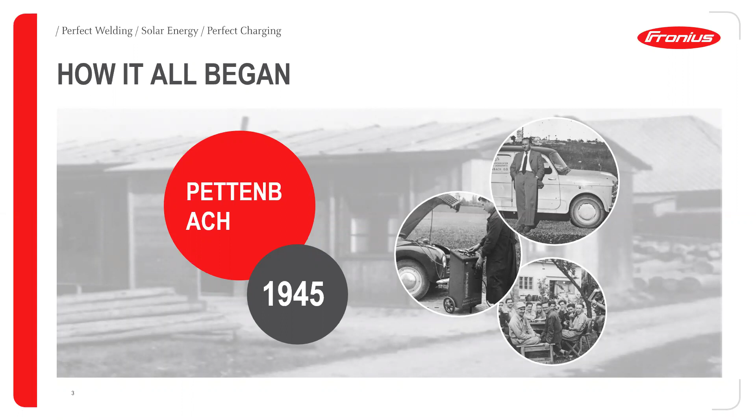To give a small introduction about Fronius - probably some of you might know, or some of you are new, as I mentioned. It all started by Mr. Gunther Fronius, on his name, in 1945, right after the Second World War, in Pettenbach, Austria. He started repairing car batteries, and found a charging technology to fix the car batteries and resell them.

Later, today we have 3 business units: Perfect Charging, Perfect Welding, and Fronius Solar. That's the latest, but still we have 27 years of experience in the Fronius Solar business. It started in 1992 with our first inverter.

And why Fronius? There are many PV inverters available in the market, probably for a little less price. Why Fronius? We have 27 years of experience, so you have to pay for that - no, sorry, it's not that. We have something different on board, like a better cooling concept, better operating things, and also a better algorithm for shadowing. There are a lot of technical aspects there.

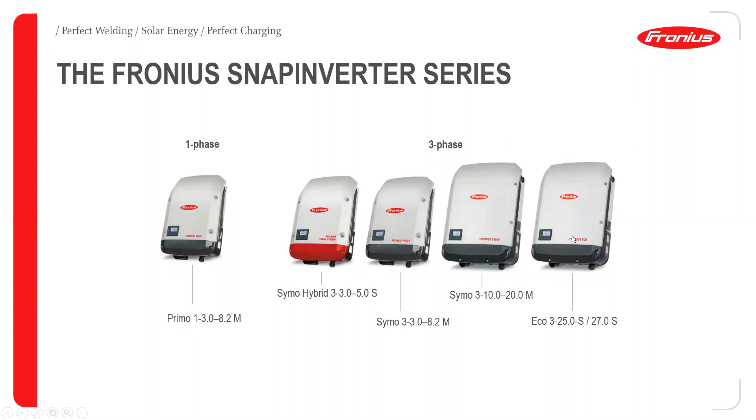Residential, we have two groups: residential market and commercial market. Commercial means in Sweden - I think there are some 20 megawatt parks going on. So we can't say Sweden is a small market, but it's a growing market for commercial.

But getting back to residential, Sweden is really, really interested in selling a lot of residential PV systems. It's growing, almost doubling every year. You all know about it, I'm sure.

So SYMO or Primo, these are the residential inverters from 3 kilowatt to 8.2 kilowatt. What does this 3 mean? That's 3-phase. And S or M - S means single MPP tracker, M means multiple MPP tracker. So next time you see SYMO 8.2-3-S, yes, that means it has only a single MPP tracker.

Many people buy the M version even though they don't have two different roofs or shading - they just buy M without seeing if it's necessary. Please use our tool, our solar configurator tool, which can tell you which inverter suits your needs better.

So you don't need an M version if you don't have shade and if you don't have two different tilt angles or two different roofs. You just buy the single MPP tracker version.

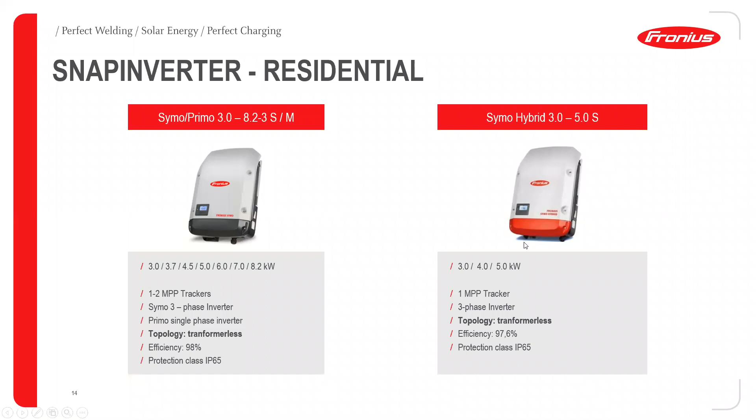Just a second. Hi, Tim. Are you there? Sorry, I thought I hadn't started the recording. No, I have started it. It's okay, it's still recording. Okay, thanks, sorry, I just have to remember whether the video is recording or not.

We actually had a question from the chat, so we can take it: what is the efficiency referring to, what load and which conditions?

That's basically a weighted average of different conditions - low load, mid load, and high load. Based on different loads, you can get this efficiency.

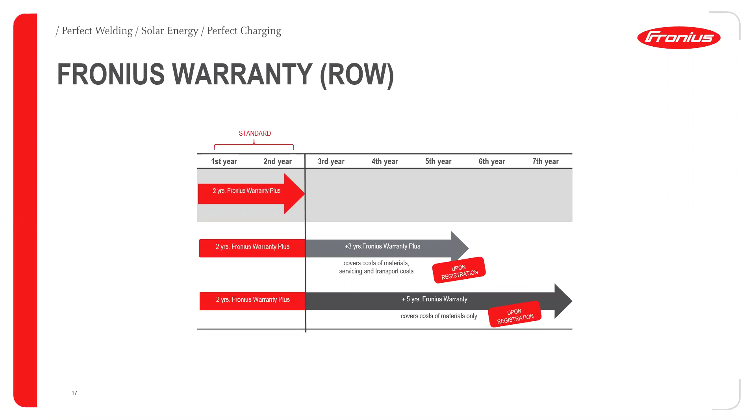Also, if the customer wishes to buy more than this, you can extend it on the website. Of course, there's a difference in price depending on whether the customer does it or you do it. That's a different topic.

Fronius storage solutions. As I mentioned, this red color is meant for battery-connected inverters. The red bottom cover is the only visual differentiation. Of course, there's a sticker mentioning Symo Hybrid, but instead of normal gray covers, we have this red cover only for the hybrid inverters where you can connect batteries.

They are 3, 4, and 5 kilowatt 3-phase inverters with a single MPP tracker, because the other MPP tracker is dedicated for the battery. There's also a backup power mode option, which means that when there's a grid failure, this inverter will start and run, and it can supply power if you have installed the emergency power switch. You can connect an LG Chem and BYD battery.

So far, probably many of you installed Fronius batteries, but we had to discontinue them last year, I think, because they were produced by Sony for Fronius, and Sony decided to stop that battery. So that's why you can't have this battery anymore. Sorry for that. But LG Chem and BYD are definitely going well, and I know many installations in Sweden have these LG Chem and BYD batteries.

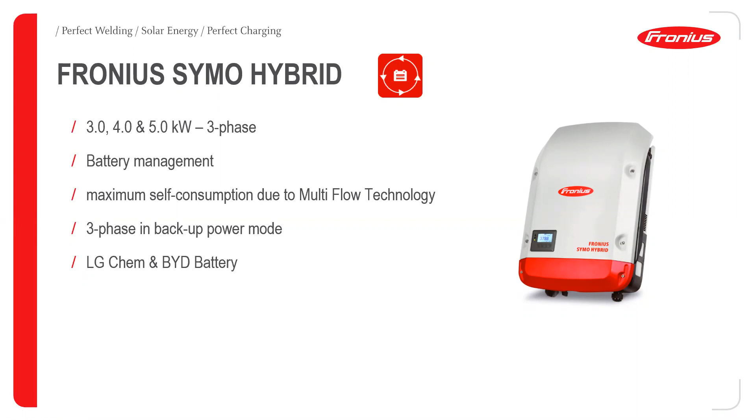Single line diagram of this. An important thing about Symo Hybrid is that with a normal inverter, it depends - you don't need a smart meter. But when you want a Symo Hybrid connected to a battery, you definitely need a smart meter, because this tells the system when to charge and discharge the batteries. So the important components for a hybrid inverter are the hybrid inverter itself, the Fronius smart meter, and then the battery.

For LG Chem, you need an additional component called the Fronius checkbox, because this checks the voltage coming from the inverter. Since LG Chem batteries cannot handle more than 500 volts, it checks the DC coming from the inverter. Of course, it's not going to send out 500 volts all the time, but in case it accidentally does, we don't want to damage the battery - that's why we have this checkbox. It will disconnect the battery if there's high voltage.

Apart from that, sometimes I see installers - some new installers - just connect the battery-to-inverter cabling but forget the Modbus cabling. Or sometimes they do the Modbus cabling and the power cabling, but forget to turn on the interface page. By default, the inverter will not know if you have a battery connected or not. So you have to access the interface page of the data manager and turn on the battery setting - that's when the inverter knows there's a battery. Otherwise, you can connect the battery, and even if the Modbus connection and cabling are correct, the battery will discharge but will never charge unless you tell the inverter there's a battery connected.

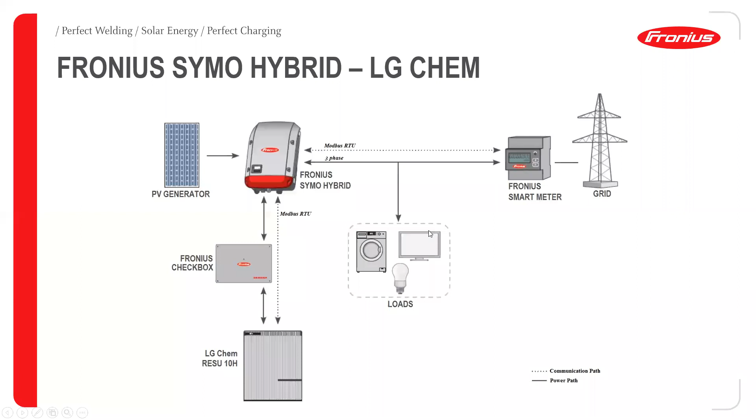Vinoth, we have a question in the chat: does the inverter of the battery provide 50 hertz, or how does that work?

You mean in the emergency power mode? Okay, to give you more detail, no, that's not 50 hertz, it's something around 52.5 or 53. When I say emergency power mode, remember I mentioned that when there is no grid, the inverter will restart in emergency mode - that's a secondary country setup. So in this emergency mode, the inverter will produce a different hertz. That's why you cannot have a secondary producer involved during emergency mode, because that inverter needs 50 hertz to start and run, but this inverter will produce 53.

If it is for countries like Sweden, the normal grid is 50 hertz, so this emergency mode for Sweden is like 53 hertz or something like that. But for countries with 60 hertz, the inverter will start up at 63 hertz in emergency mode. So it's not the same frequency as the normal grid.

That's basically to make the inverter able to listen to the grid and check - if something else is at 50 hertz during the emergency mode, then you know either you're connected to the grid or you have another inverter connected, which you're not allowed to have. So yes, it's basically a self-check achieved by changing the frequency.

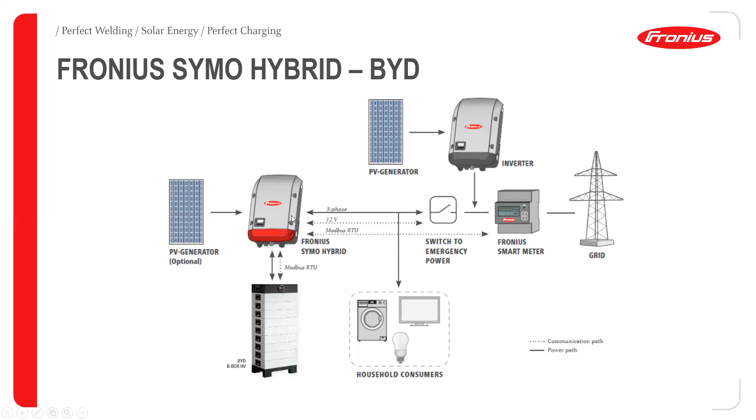As I mentioned, is there any battery option for Fronius Symo, Primo, Galvo, or Eco inverters? Yes, there is one option: Solar Watt batteries, MyReserve Matrix. There's a certificate available on our website showing what's possible with Solar Watt battery. There's also a webinar available for this and all the topics I'm discussing now - a detailed webinar on the Fronius Solar website. If you can't find a webinar on a topic, you can always contact Tim or me so we can arrange a new detailed webinar. Hopefully there are webinars for everything - Home Pilot, electric vehicle charging, batteries, Solar Watt batteries, BYD batteries, LG Chem batteries, everything.

Coming back to Solar Watt batteries - if you want to have a Solar Watt battery installed, to give you a brief overview, you need 4 components: mainly the inverter (Fronius Symo or Primo Galvo), the battery itself (Solar Watt battery), Fronius smart meter, and Fronius Solar Watt AC sensors.

This is very important if you are connecting a solarwatt battery, because here the solarwatt AC sensor communicates to the battery when it has to charge or discharge the DC power. These batteries are installed between the PV module and the Fronius inverter, so that it stores the excess DC when there is no need for PV to produce.

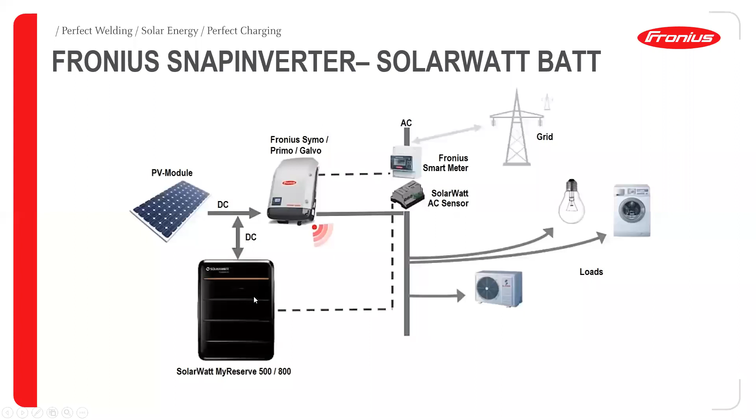Primo Gen24 is not our interest because that's a single phase inverter. Symo Gen24 Plus is the three phase inverter with power classes 6, 8, and 10 kilowatt.

So what are the advantages? What do we learn from the Symo hybrid, what improvements did we make? One, we learned that there is a need for bigger power class hybrid inverters. And next, we learned that we need 2 MPP trackers for the PV itself. So in this inverter, in total we have 3 MPP trackers: 1 for the battery and 2 for the PV.

So 2 MPP trackers dedicated for PV, so you can connect 2 different roofs, or connect different shading panels into a second MPP tracker, or whatever you think. And then there is no display.

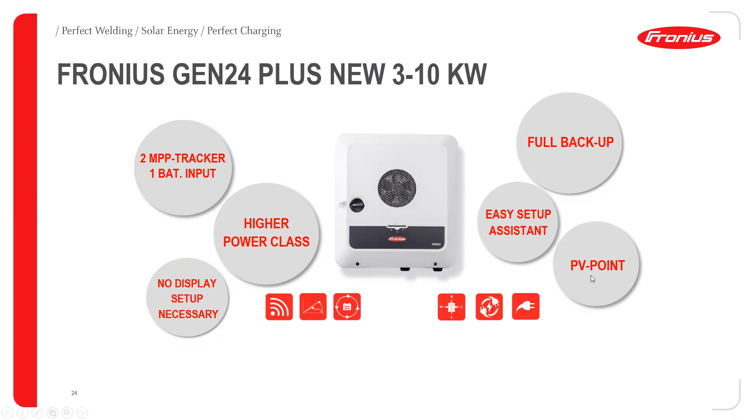Symo Gen24 Plus is a 6, 8, and 10 kilowatt unit with easy planning, installation, and commissioning. We have been testing this commissioning specially, mainly for easy setup, user-friendly operation. The commissioning procedure is step-by-step with the display: choosing language, choosing country, choosing if you want to keep the MPP Tracker 2 on or off.

It's the same thing, but without a display. As soon as you establish a connection between your smartphone or tablet to the inverter, you will choose everything in the phone or the tablet - just the same procedure, except there is no display in the inverter.

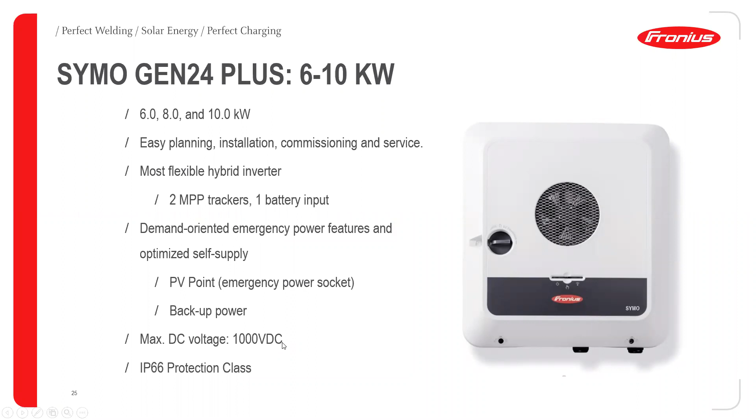As mentioned, it's a more flexible hybrid inverter because we have 2 MPP trackers for the PV itself. There are 2 different kinds of emergency power modes: one is called PV point, and the other is full backup power. We will see more detail about these in the next slides. The maximum DC voltage is, as usual, 1000 volt DC, and the IP protection class is IP66.

PV point - this is a basic backup power. It is possible to have a PV point in all the Symo Gen24 inverters. There is an option on the AC side, next to the AC connections, where you can take a single phase output. You can create a plug point anywhere in your house or garage, and this plug point will work when there is no grid. There are no additional switching components needed for this - it has its own terminal in the inverter.

This is functionable without a battery as well, and of course it will also work with the battery. But sometimes when it comes to hybrid inverters, people are preparing for the future - they just buy the hybrid inverter but don't have a battery for 2-3 years. Still, they can use this PV point function without a battery.

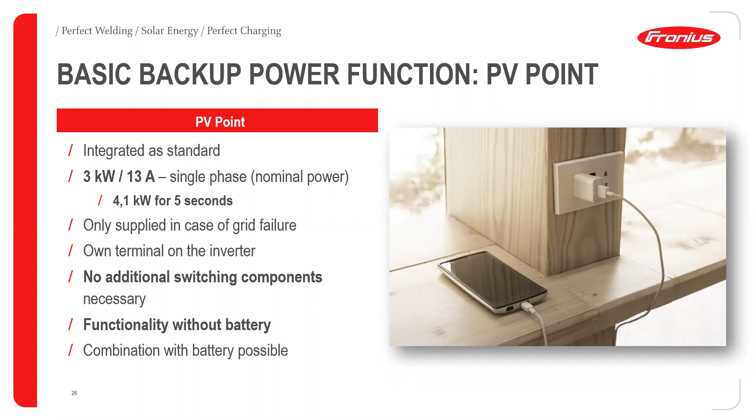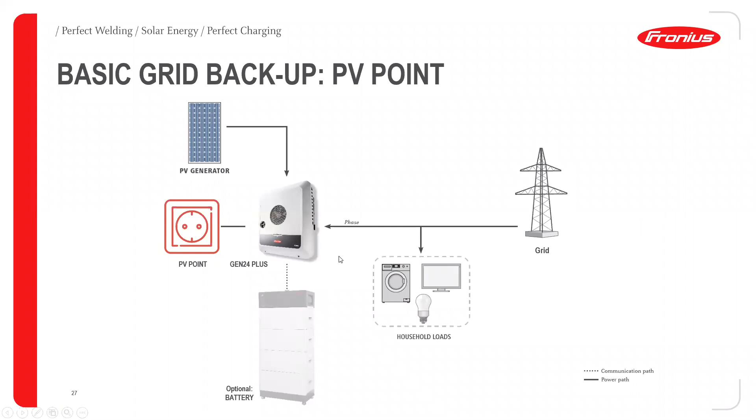Let's look at how it works using the single line diagram. So PV generator, like PV panels, Symo Gen24 Plus, and battery - that's optional. When there is no grid, this PV generator will still produce and supply only the PV point. Remember, not the normal output point, because without a grid, the normal output power will not work. So basically the inverter will produce and just supply one single phase point.

There is a limitation - you can't have like 10 kilowatt in this PV point, it's only possible 3 kilowatt. What happens if it exceeds that? Of course, it will turn off. If you try to connect a 5 kilowatt motor to this PV point, it will not start up. So it's 3 kilowatt single phase and maximum 13 amps. If you exceed that a little, it can withstand for a couple of seconds, but it cannot run fully. So you cannot turn on big loads like a motor in this PV point.

If you have a battery, the PV generator can charge the battery, and the PV point can work. But remember, this is not full backup power, so you cannot supply the whole load yet. You can charge the battery or supply the PV point, and if you don't have sun, the battery can also supply the PV point, but you still cannot supply the load. That's the basic PV point, because you don't have to install any other external components.

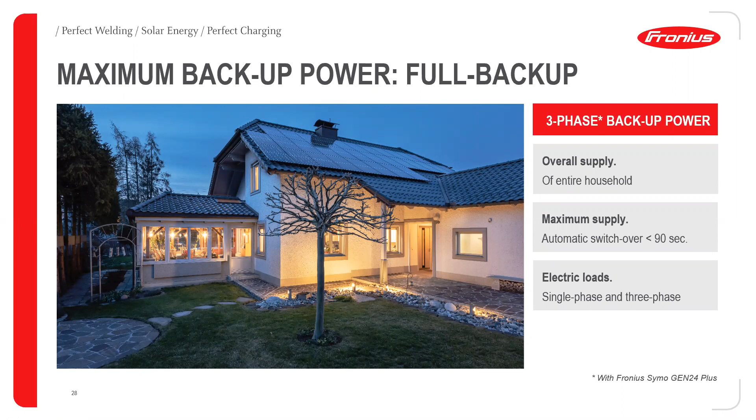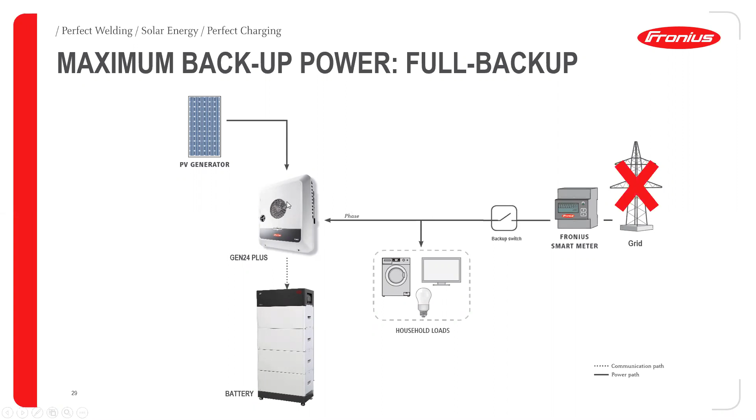There's a small picture showing how it works. When you have a battery and a backup switch installed, you can have this full backup power. It's the same concept as the Symo Hybrid. When the grid fails, the smart meter tells the inverter there's no grid, and the inverter will disconnect the whole home load from the grid, then restart in emergency power mode. Then it can charge the battery, or you can supply the load, or supply from the battery to the load. That's possible, so multi-flow technology will work the same as when it works with the grid.

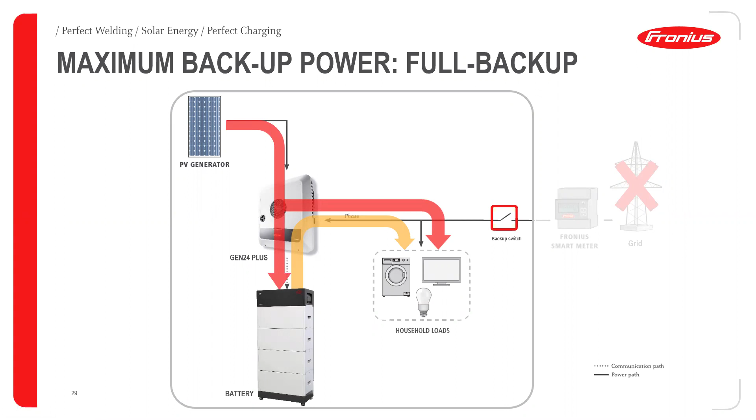The components here are the battery and the disconnector. As I mentioned, this Enwitec box is from a German manufacturer. They supply the predefined relays and everything, so it's plug and play. If you buy this box, it's easy, or you can do your own emergency switch with relays. There's a circuit diagram available for Symo Hybrid, and soon you'll get the circuit diagram for the Gen 24 Plus, Symo GEN24 Plus as well. This backup power is supplied up to 10 kilowatts, because the output power of the inverter is maximum 10 kilowatts, so you can't expect more than that. Also, the allowed runtime in backup mode is 15% of its operating time.

I forgot to mention one thing - how do we handle this? It's not a problem until the inverter gets into trouble. When something goes wrong, the first thing we check, or our tech support team checks, is how long it has run in normal mode versus off-grid mode. We can see this information on the interface page, and you can also see it there. So that's how it works - it doesn't fail immediately, but if you put it in off-grid mode for a long time, it can fail, or it may fail. It's up to you.

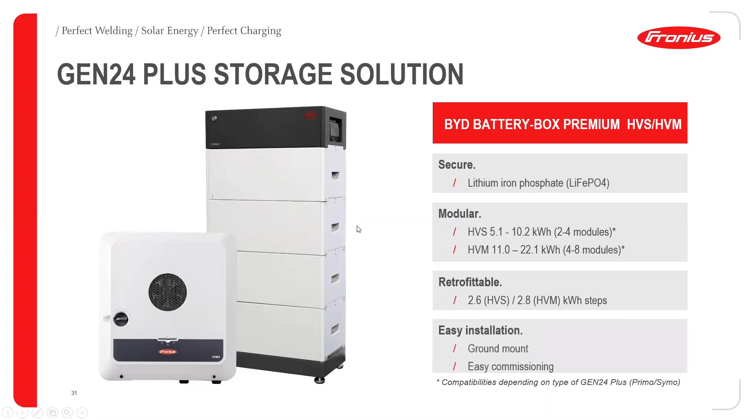Fronius SolarWeb. Why do we need SolarWeb?

One thing is to monitor how the inverter functions, and the other thing is why it's important for an installer. Because you can already analyze if the inverter is performing well or not. You can compare, or if there is a fault, you can get notified proactively, so that when the customer contacts you, you already know what the fault is or why it's not performing as it should. So this is an analyzing and monitoring tool for customers and also for you as an installer.

What is the advantage of having a premium membership? We have two memberships in SolarWeb: a basic user and a premium user. Maybe the end customer doesn't need the premium function, but as an installer, you definitely need it because it has a lot of value.

I would like to show you a real demo with SolarWeb, because when we open SolarWeb, we can see what is the difference between a normal user and a premium user on every page, for example.

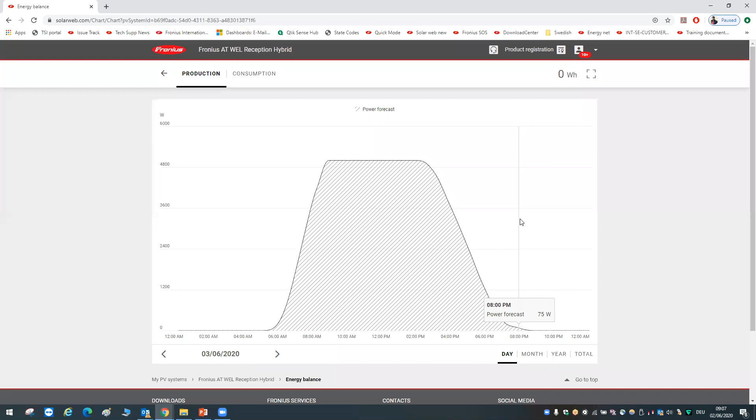So if you go to energy balance, you can see a more detailed view of how much he can expect today. Based on the weather data, this is the forecast for his PV production for today and tomorrow. Maybe based on this, he can shift one or two of his loads so that he can consume optimally. That's one advantage.

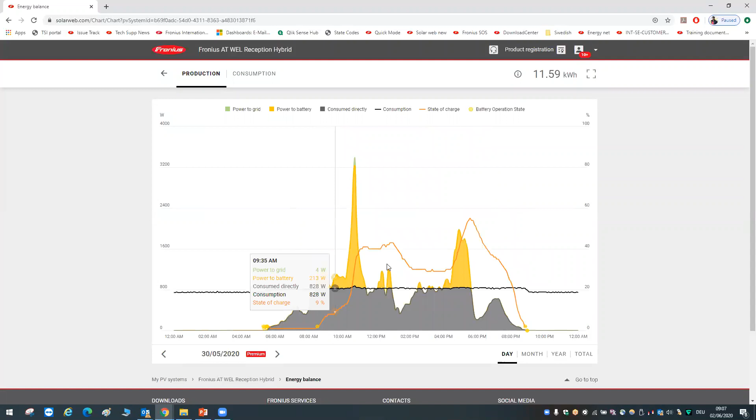And if you go further, for example into energy balance, if you want to see how much I'm producing every minute — if I go back to yesterday, I can see every 5 minutes how much I produced or how much I sent to the battery, things like that. As a basic user, I can only go back in the detailed view for 2 days in the past. If I go back more than 2 days, I cannot see this unless I'm a premium user. Of course, you can still see the monthly view, like the total production of a day.

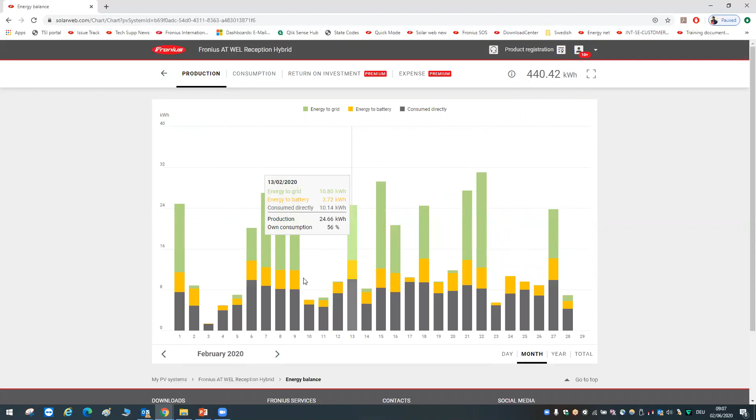As a basic user, for any number of time, that's not a problem. But if you want to choose a detailed view, definitely you have to be a premium user. Why? Because it takes a lot of storage for us to maintain these data, like more detailed views and everything. We need more space, we have to improve our cloud, so we have to invest a lot of money here. That's why we are charging our customers to become a premium user.

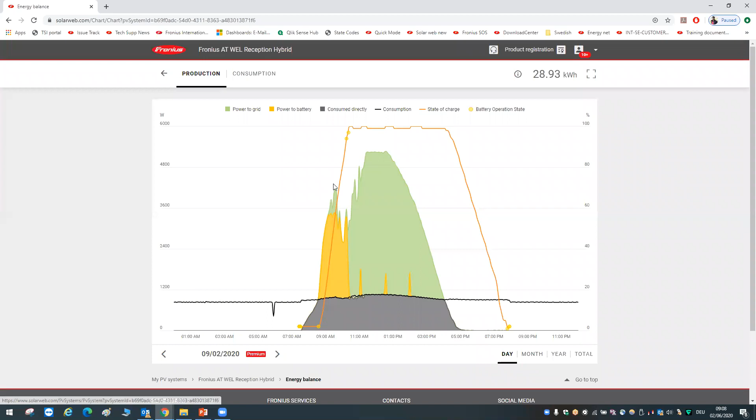Of course, most of the time, the end customer doesn't have to be a premium user, but it depends on him. But definitely as an installer, I will recommend becoming a premium user so that you can have these facilities, for example, analysis.

Also, as an installer, you can choose devices. For example, if there is a problem and you receive a call from a customer saying, I have a problem, you can see, as a premium user, how much power came from the battery, or goes from the grid, or how much is going to the battery, things like that. It's only possible for premium users. As a basic user, customer can see how much power, DC current, DC voltage, or total power. This is possible for all users, but to go more detail about the batteries and everything, because this needs more data.

So of course, here also, it's only possible to go back 1 or 2 days in the past. If you want to go more than that, you have to be a premium user. So anything which has to do with detailed views, you have to be a premium user.

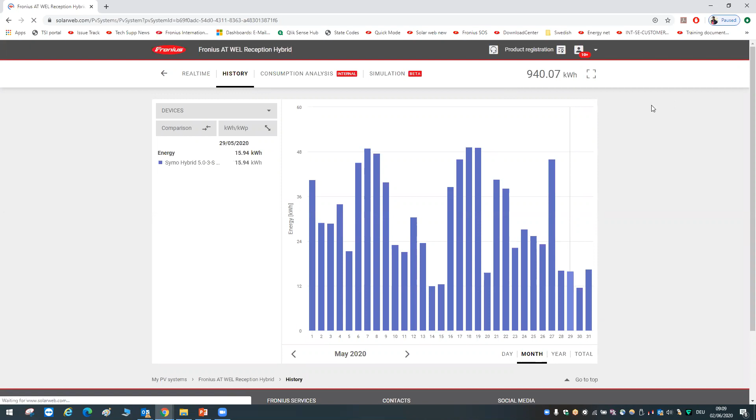Otherwise, there's not much big difference, like for example, to update an inverter. If you go to components, you can update your inverter. There, you don't have to be a premium user. You can simply go here, but I can see this is fully updated, up to date. Normally you see a red button here in the column saying update, so if the inverter needs it, you can do this update remotely.

And what else? For example, if you go to collect some reports, you can set automatic reports, or you can download a report of how much you're producing. For example, click create a report. If you want to see how much you are producing in an Excel file, you don't have to be a premium user, you can simply do this.

But as a premium user, you can see more detailed values, not just a daily sum. As a normal user, you can just go and create a PV production report. It can be automatic. For example, if you choose automatic report and weekly, then every week this customer will receive a report with how much he has produced on Monday, Tuesday, and Wednesday, something like that.

But it will give only the detailed value if you, as a premium user, go and choose more detailed values. Or it can be daily sums, it depends. But if you go for detailed values, you can see how much he produced every 5 minutes, and you can choose between different functions, like how much voltage. This is not useful for just monitoring, but for troubleshooting, definitely it's useful. You can see if there are any voltage dips or something, whatever, you can see it here.

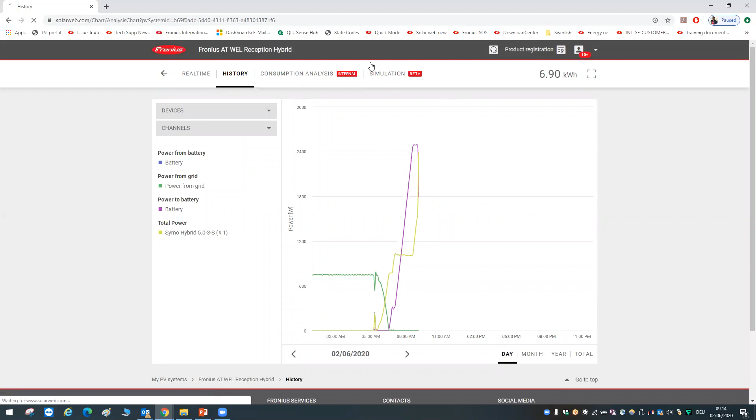Or if you go to history, you can see much more detailed views, as I mentioned before. Otherwise, if you go to energy balance, you can see the PV production, how much I'm produced and how much I'm sending to battery, how much I'm consuming directly, things like that. And also you can see the consumption.

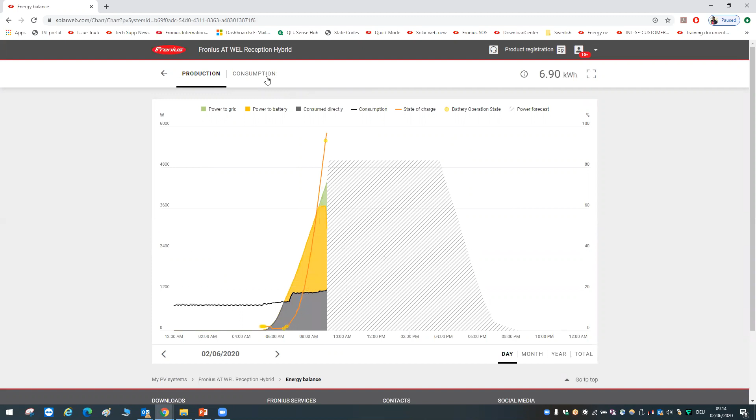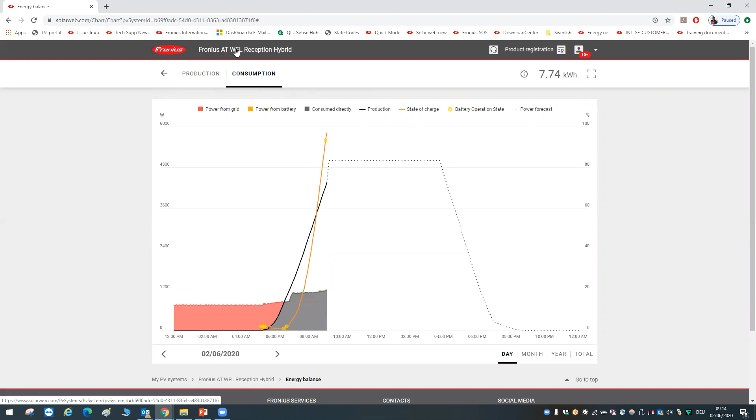So, and the report, as I mentioned, you can create a report like a daily or monthly or weekly report based on the customer need. You can get a whole PV production, or you can create a customized report with the detailed values, like every 5-minute values.

And settings, if you go to settings, that's the next level. So basically in the front page, you will have all the basic functions which you need. These are the information, or troubleshooting page, but these are the things where you have to do some, for example, if you want to change the PV system profile, for example, country, time zone, or like installation date, things like that.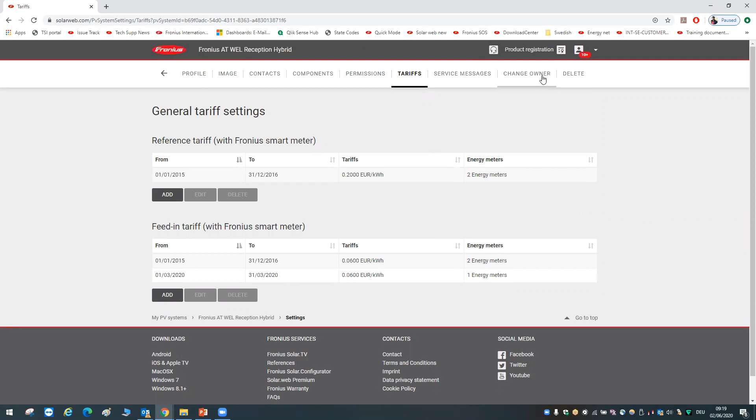Change owner, of course, only the owner of the PV system can change an owner. In this case, this guy is the owner of this PV system. If I enter my own details, I don't have permission, because only the current owner can change this ownership. For example, if I enter anything, it will deny. So this is asking if I want to keep permission for the current user. Yes, I would like to keep the permission as a supervisor for the current user.

Most of the time, the installer creates this PV system under their email address, under their SolarWeb account, and then later they ask the end customer to create a SolarWeb account. Then they give the rights. At that time, you go to change owner, enter the customer's email address, and then keep yourself as a supervisor, and then you can queue the change owner. Right now, I cannot do this because only a current owner can change the owner of any PV system. So if Lasati Andreas logs into his account, he can do this for me. He can make me the owner, and then he will become a supervisor. So this is what you are going to do for your customer.

And deleting a PV system, of course, it's possible only by the owner of the system. This is the brief info about Fronius SolarWeb. Just play around with it, create your own account and play around with it. If you have any questions, feel free to reach me, or our tech support team will help you.

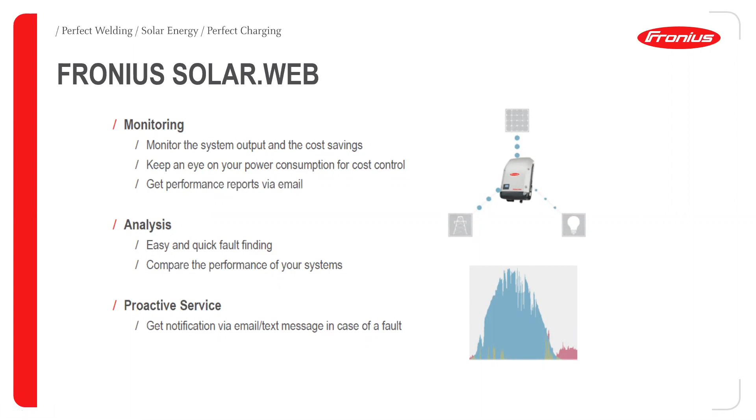So there are multiple things, like updating a PV system remotely. That's possible. Monitoring with the yield forecast for 48 hours. Of course, you can do multiple simulations. For example, you can simulate the Ohmpilot. You can simulate and see how much he is going to save when he installs an Ohmpilot. For example, let's take this system, and then he can go to...

Analysis. And for the people who don't know what an Ohmpilot is, can you briefly explain what it is? Oh sorry, yeah, it's there in the upcoming slides. But the Ohmpilot is a device that can control your excess production and send it to the heating rods. You can use any infrared heating or floor heating or anything, or hot water tanks. So you can connect your ohmic loads, like resistive loads, to this Ohmpilot. So the excess production will be sent to the heating system directly. For example, okay, I think it's wise to explain about the Ohmpilot first before I show this simulation.

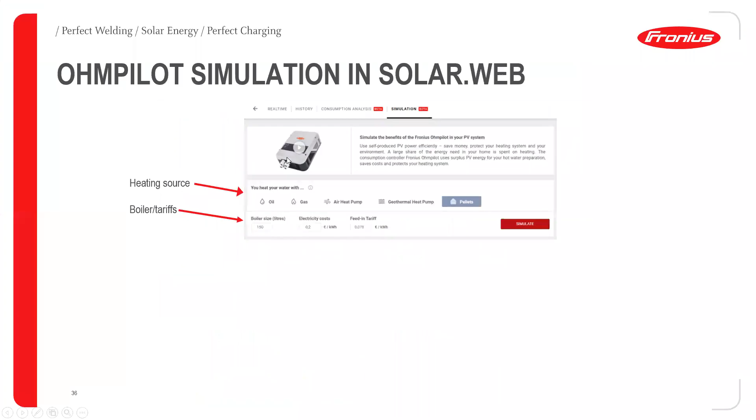So going back here, Fronius smart meter. Of course, you need a smart meter for two things: to monitor your consumption. Why do I need to monitor my consumption? For example, if you monitor your consumption, you know that today Sweden is paying, you are getting some money for feeding in some energy to the grid, but maybe that will change in the future. At that time, you will be interested in consuming your own energy, not sending it to the grid. For example, in Denmark, they don't get any money for sending to the grid. So if this system is installed in Denmark today, he is really losing a lot of energy here.

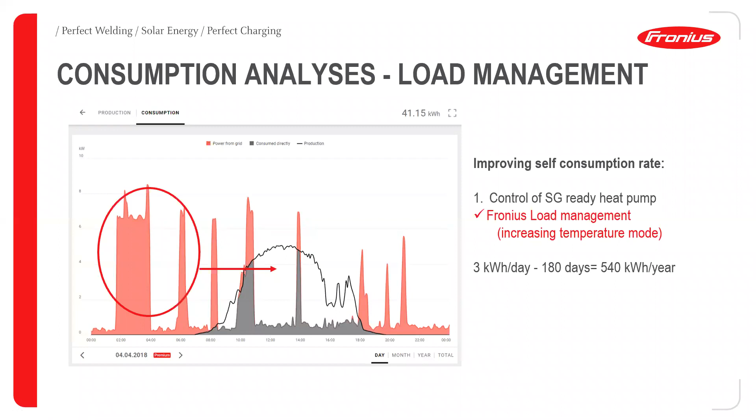So we have a single phase smart meter and a 3-phase 63 amps and 50 kA-3. That's for the bigger systems. You need a current sensor for this if you want to use it.

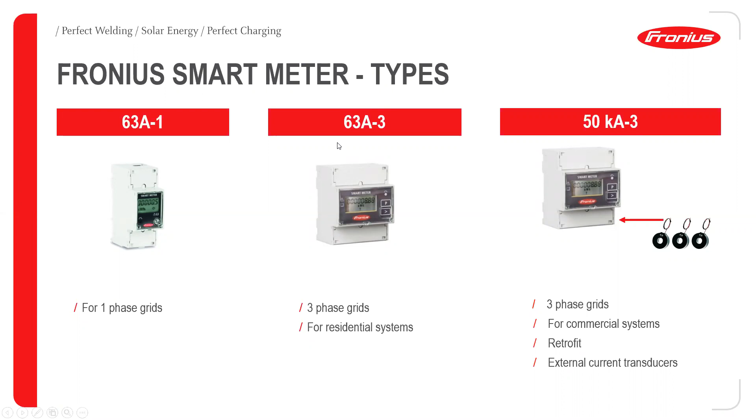Most of the time, this is the residential or most sold smart meter they use. You can install it before the utility meter, called feed-in path, so that you can measure whole consumption of your home and the whole export to the grid. Or you can put an additional smart meter here, and then you can measure only what your particular load consumes. And of course, you have to activate this on our web page telling that you have a smart meter installed. Otherwise, our system will never know if you have a smart meter or not.

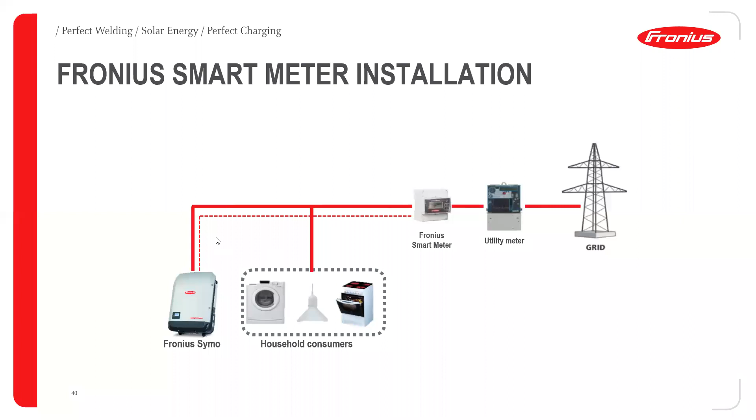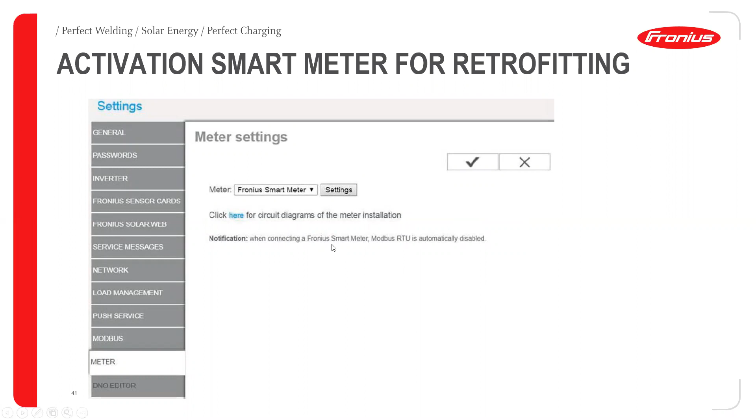So whenever you install a battery or a smart meter, you go to the interface page of the data manager, and then you tell what you have connected. If you have a meter, you have to choose the meter, and then it will ask you where you have placed it. If you placed it before a big load, you tell it's just a consumption meter, so it measures the load. Or if you put it in the feed-in path, before the utility meter, you choose feed-in path, so it will measure how much you are producing and also how much you are consuming. So to display the right values, you need to choose which meter is installed where, so you can address the meters and choose what meter does what.

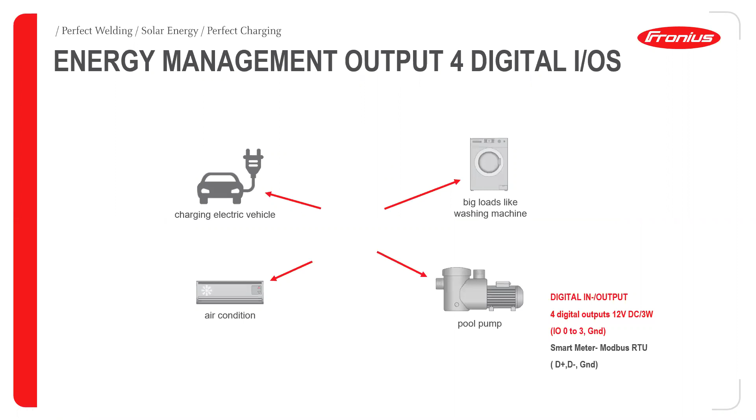Coming to load management, you have the option to control, we have 4 digital IOs, so you can control up to 4 loads. If you look into your inverter, in the DATCOM region, we have the data manager, and in the data manager you can see this orange plug. There are 4 IOs available in this orange plug. Or in case you want Modbus connection, this is where you connect your Modbus, on the right side, D+, D-, and minus.

For taking like a central control system or whatever, you can use this Modbus to take information. And these IOs are used for controlling different loads. It can be an air conditioner, pool pump, or a big load like a washing machine or whatever.

How do you set it up? You can choose which load, say IO 1, and decide: I want to control by power production, or I want to control by surplus power. If you choose power production, you will control based on the power produced by the inverter. You can set up a rule like turn on this load when I produce 500 watt, when I produce 2 kilowatt, or whatever, or turn off this load whenever I produce this much energy.

Or if you choose to control by surplus power, this will control your load based on the feed-in. It doesn't care how much you are producing, but it cares how much you have in excess. For example, whenever I have 1000 watt excess, I will turn on my load. Then it will turn off when the consumption is 500 watt. If I'm consuming more than 500 watt from the grid, or you set your value like 100 watt, if I exceed that limit and start consuming 100 watt from the grid, then it will turn off this load. So you can set on and off limits.

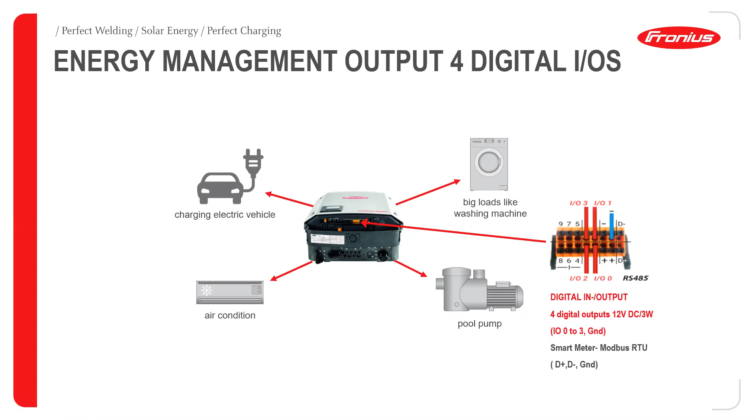So this is the load management system we provide. You can control up to 4 loads. It can be anything, but you have to connect a relay, because these IOs send a 12 volt DC digital output which can trigger a relay, and then it can turn your load on or off.

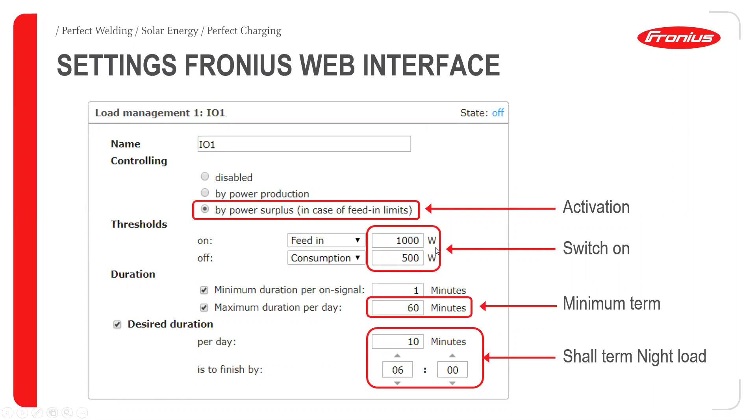But there's a lot you cannot control here, because it's only an on/off function based on the surplus or PV production. That's why we have the Ohmpilot, because this is a continuously variable device. It doesn't care — as long as you have excess energy of 300 watts, it will send it to your heating system.

You can connect a single phase or 3-phase system. If single phase, it's possible to have up to 3 kilowatts; if 3-phase, up to 9 kilowatts. You can connect up to 2 heating rods, and it's plug and play. You can retrofit it to any PV system, not just Fronius — this Ohmpilot can work with any inverter.

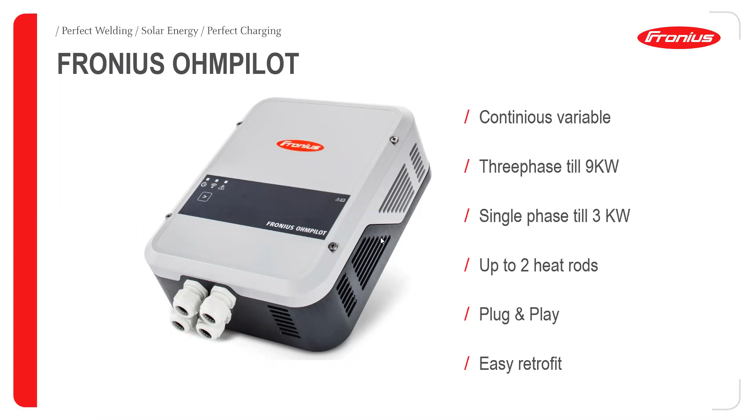It communicates through Modbus or through WLAN. Whenever there is excess energy going to the grid, it will be sent to the Ohmpilot. For example, if you are producing 1500 watts and consuming 1000 watts from other loads, and sending 500 watts to the grid, the smart meter will tell us that this can be sent to the Ohmpilot.

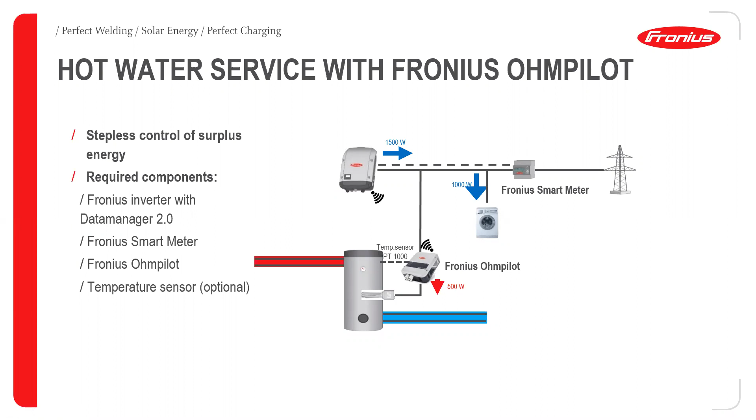So this is continuously variable — it's not like an on-off function. Whatever excess you have will be sent to the Ohmpilot, and the Ohmpilot will send it to the resistive loads. Whatever loads you connect, it can be anything, but it has to be resistive — it cannot operate a complex motor device or something. So you can connect heating rods or floor heating, or if it's a smart grid ready heat pump, you can connect that to the Ohmpilot.

It's the same with electric vehicle charging. For example, you can connect a 12 volt relay to one of the IOs, and then connect it to the electric vehicle charging machine. Whenever there is a surplus, or a minimum production level you've specified, it will turn on this relay and start the charging.

But what happens with the relay, as I mentioned, is it's like an on-off function. At a certain PV production level it turns on the relay, and at another level it turns off. For example, here it looks like it turned off at 500 watts and turned on at around 3 kilowatts or so. So it charges with a constant power — as soon as the relay turns on, it charges at, let's say, 3 kilowatts here.

So this is still not fully optimized, because you can see this gray region — this power is coming from the grid, while the red is the PV production.

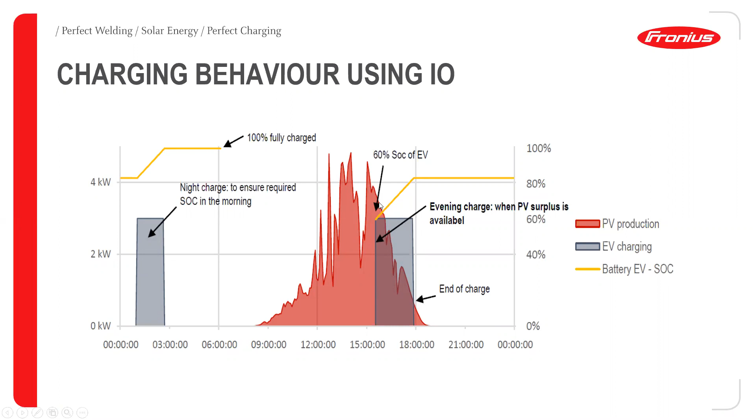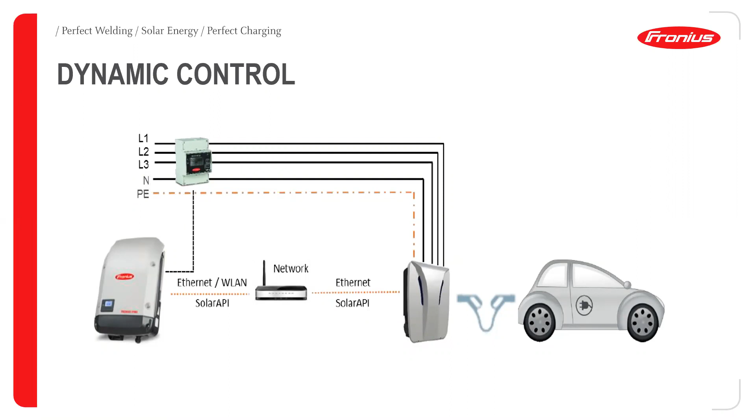You can exactly match the excess production to the charging, unlike the previous case where it's consuming constant power, charging at a fixed rate. Here, instead, it charges with the exact surplus power available.

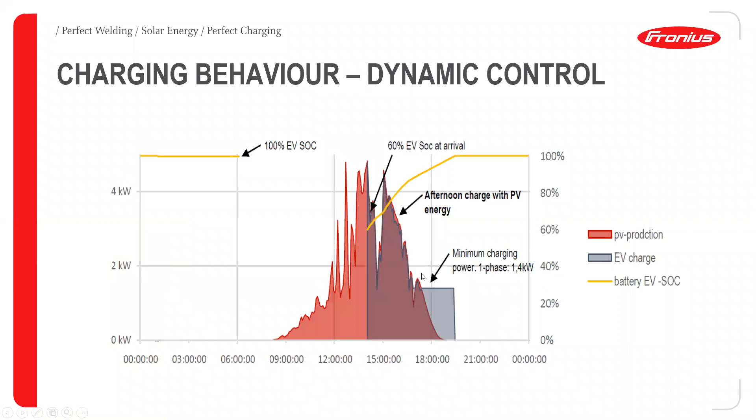To compare it in one slide, you can see this first picture showing a normal system with no communication. You just come home around 4 o'clock in the evening and plug in your electric vehicle to the charger. It charges with the maximum available power — say 11 kilowatts — and is fully charged within an hour.

But if you look later the same day, he is producing power up to around 8 o'clock, and he is still sending this excess to the grid instead of using it for charging.

So at 4 o'clock he consumed a lot of power from the grid, and at a later point he is sending to grid. That's not wise, that's why we have this load management function. If you use that, when you come home at 4 or 5 o'clock, whatever surplus you have, you use it with the surplus, so it's controlling the output power. But still, dynamic control is better. If you compare the first picture and second picture, you can see the difference.

Of course, he is also going to charge his car fully, but at a later point of the day. He will wait until whatever he gets with PV, he charges with that, and then does a full charge later at another point of the day. But if you see the dynamic controllable option, you can already see the difference, that it's a more optimal solution, so that you control dynamically how much power goes to the grid and how much goes to the EV charging based on your excess production.

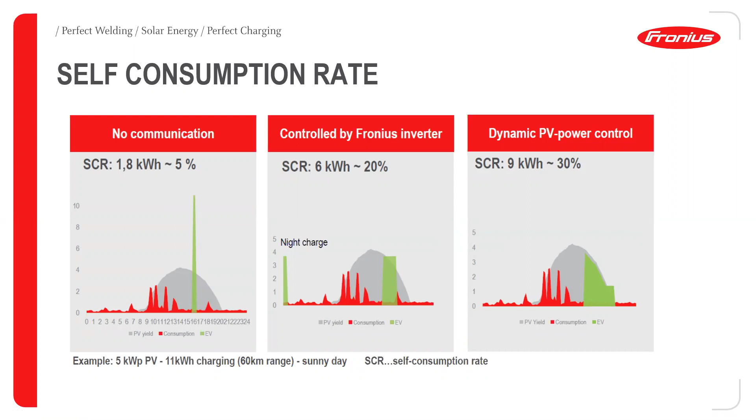Getting back to troubleshooting and service process - or will you take the simulation on the Fronius Solar Web? Yes, exactly, thanks for reminding me, Tim. I've been waiting for this. So if you go to a PV system, then go to analysis, you can see there are different simulations. Right now it's not the external one, the battery simulation, because it's under testing phase.

But if you look at the simulation of Ohmpilot, you can choose what options you are using. So today, let's say this guy is using - I don't know what's most common, is oil not most common in Sweden? Maybe geothermal or central heating systems, but let's choose geothermal. So today he's using geothermal, and we have to choose energy consumption per year.

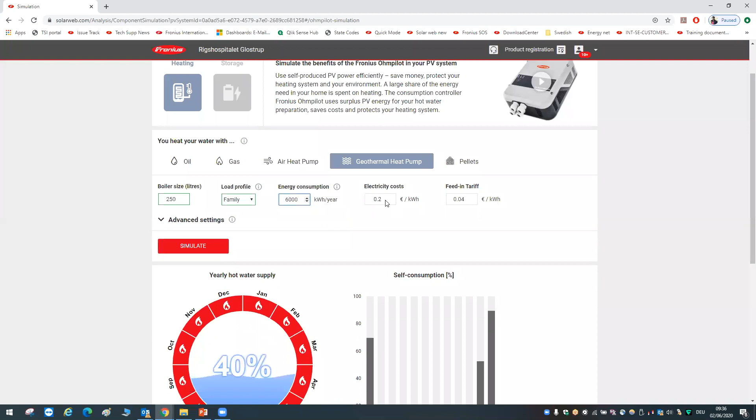And here I have to choose the boiler size, let's say 250 liters, and a family or employed setting - it doesn't matter, you can choose which option suits you better. So I'm a family with 250 liters of water, using a geothermal heat pump, consuming about 6,000 kilowatt hours per year, and this is my electricity cost. If I have an Ohmpilot at my home, this can tell me: this gray region is the consumption from the grid, and this blue color is where I can use my PV production to control my heating system. Based on this, I can save up to 232 euros per year.

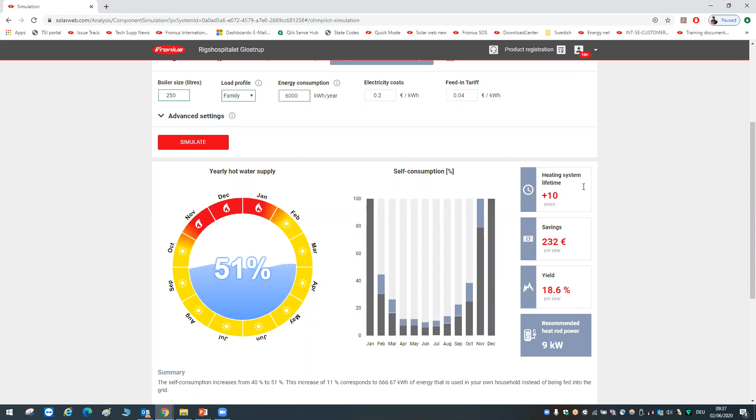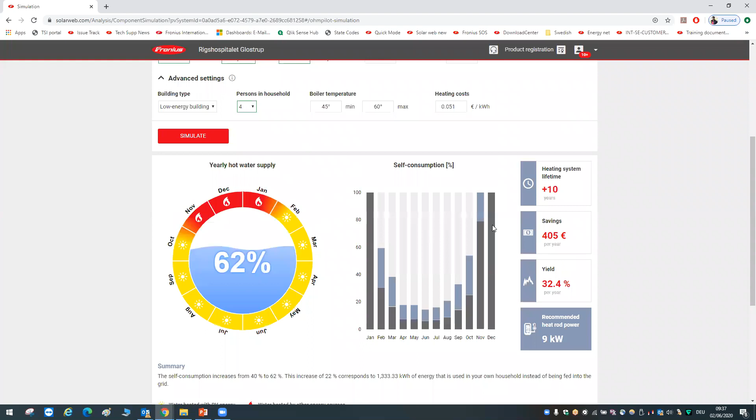I've chosen the heating system lifetime, but I can choose something different. For example, if I go to advanced settings, I can choose boiler temperature, minimum and maximum, and number of persons, things like that. This can simulate and tell how much I can save. For example, when I choose 4 persons, I can see that I can save up to 405 euros per year. All I have to do is buy an Ohmpilot and connect it to my heating rod. That's it.

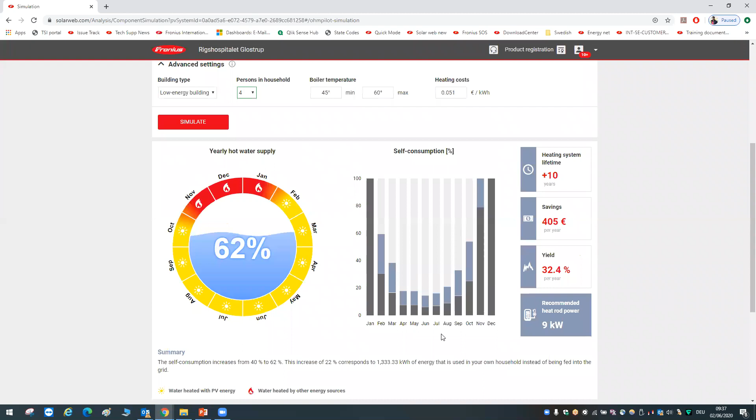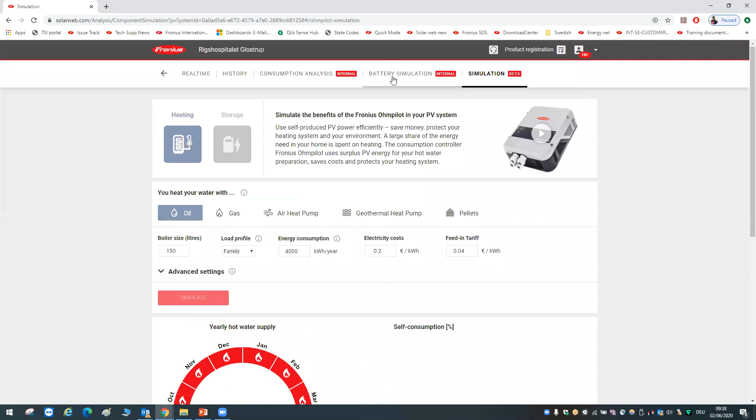Here, this is something about battery, but right now this is under beta. You can choose battery and see how much you can save based on it, but this isn't fully functioning yet. Right now, Ohmpilot is functioning well, but the battery simulation - maybe later we will come back with a different webinar where I can show the full function of the battery simulations. Sorry for that.

Coming back to the slides, there is a tech support area for installers on our website. If you go to fronius.com and go to solar energy, you can go to the info center. This place explains how to install a smart meter, how to install a PV system with the PV Genset solution or off-grid solutions, or how to do a software update, etc. This is the region for installers, where it tells about manuals, monitoring service, or other things available, like open communication, Modbus or API, things like that.

When it comes to troubleshooting, whether you're new to Fronius or not, whenever you contact us for troubleshooting, it will be easy for us and for you if you have some information collected, for example the serial number of the inverter, and if there is a state code or error code.

If there is any state code, it's not called an error code because not all codes mean an error. For example, if it says 509, it simply means there's been no production for the past 24 hours, maybe due to snow on your roof, so it doesn't mean there's an error. Or if it says 569, there may have been an isolation problem in the mornings, so that doesn't mean an error either.

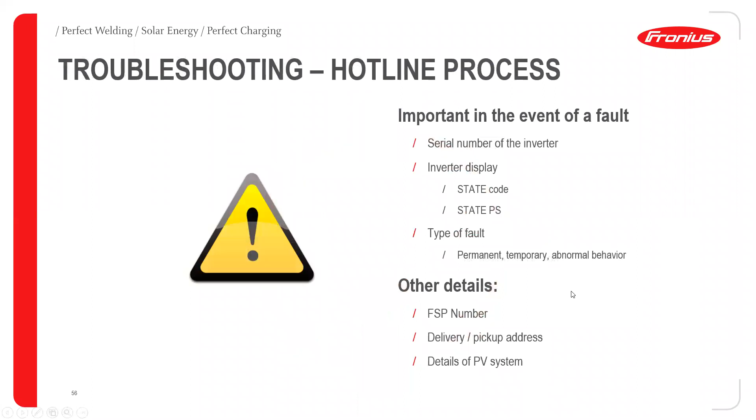So just give us a call if something is wrong, if you're not sure about something, or if you have a question - call our tech support team or one of our advisors and we will guide you from there. It's easier that way. As I mentioned, if it's not possible to solve on site, we will send you the exchange part.

You can go to the site and fix it, and then you have to return the faulty component to us. We will inspect the faulty part - that's how we know if there's a real fault or not. So it's very important to ship the faulty product back to us.

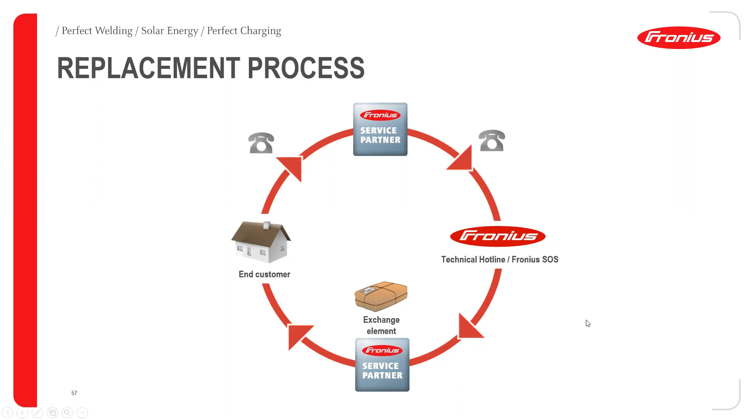You can do this return shipment using the DHL portal. If you go to the portal and enter the case number, you can create a pickup. You can schedule a pickup time, and then DHL will come and collect the faulty product.

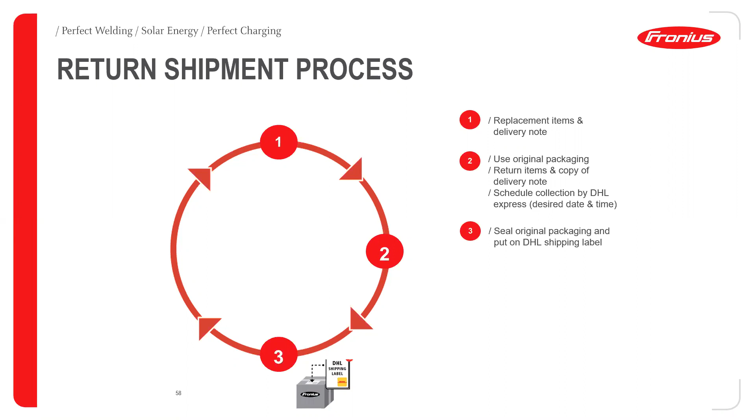Or if you are not sure about any problem, sometimes there is a lightning strike or something that's not covered under warranty, and you don't know what to do. You can talk to our support team, and we will create a pickup request so you can send this product to our service team. We will send you a quote for how much it costs to fix this problem since it's not covered under warranty, so you can decide if you want to fix it or not.

So there is a tool called Solution Online Support, Fronius SOS. This is a troubleshooting tool. If you go to this link, we will send you this presentation, and you can go to this link and create an account for yourself. For example, when you enter a state code or error code, this will help you troubleshoot the problem.

I know we are running out of time, but I would like to show this quickly because this is very important for an installer. So let's go to the SOS tool and see how to create an account here.

If you click this link from the presentation, it will take you to the web page, and then you can click register. You enter your details and click register. You will receive an email where you have to activate your account. Then you will be asked for your customer number.

You contact Fronius Tech Support, and we will give you the customer number. As soon as you create this, you will receive a customer number from us, and then you are done.

Once you have a Fronius SOS account, I will use a test account here. You can log into your account and see all your cases for the past 3 months. But it's a test account, so there is no case.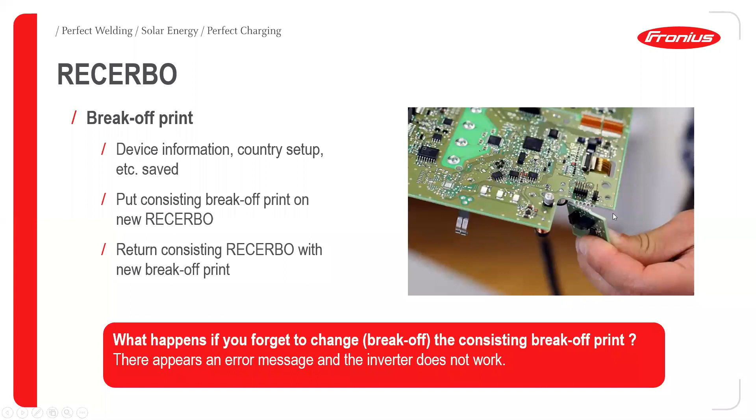In case you are changing only the RECERBO, remember there is a break-off print on it. When you get an exchange inverter, you get one with a fully programmed RECERBO. But when you exchange just the RECERBO, we send you a brand new one with no information in it. So you have to take the break-off print from the faulty RECERBO, break it off, and put it into the new RECERBO so the program gets copied from that print. Then break off the print from the new RECERBO and throw it away. Don't worry, you'll get all this information when you order a new RECERBO, or you can always reach our tech support team and ask how to do the exchange.

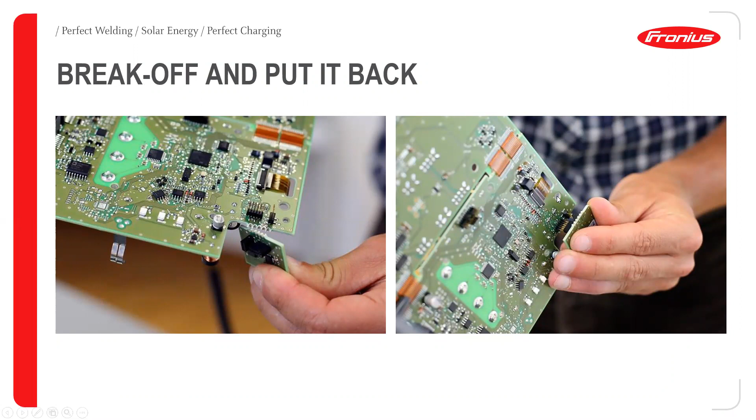So, the Fronius service partner training concept. As I mentioned, some of you may already be Fronius service partners. Now we have a new concept called system partner.

Before going into system partner, why do you have to be one? Because day by day it's increasing - previously it was only the PV system, but nowadays you want to connect everything to the PV system. Of course it's wise to connect things like big loads, electric vehicle charging, a battery, or hydrogen storage - Fronius hydrogen storage. So it's very important to understand this integration more, which means you need more training and more advanced knowledge.

Knowledge about the PV system, not just the PV system, but also other consumptions at your home. So you need to consult more - end customers need not just a PV system from us anymore. They need something more, like a smart meter, an Ohmpilot, or electric vehicle charging. That's why we want you to be more competent, with higher knowledge about everything that can be added to the Fronius system at least.

And your benefits: of course, you will be presented in our online installer search. When someone wants to find an installer for a Fronius device, they can go check our website, and you will be listed there as a system partner.

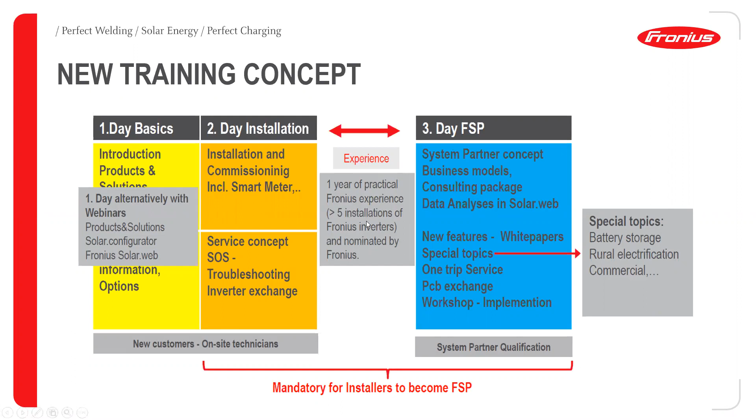But if you are a normal installer and not already a Fronius service partner, you have to participate in this training, and then you have to meet these conditions to become a system partner.

That's all, I think I took too much time. Sorry, because sometimes I wanted to explain more.